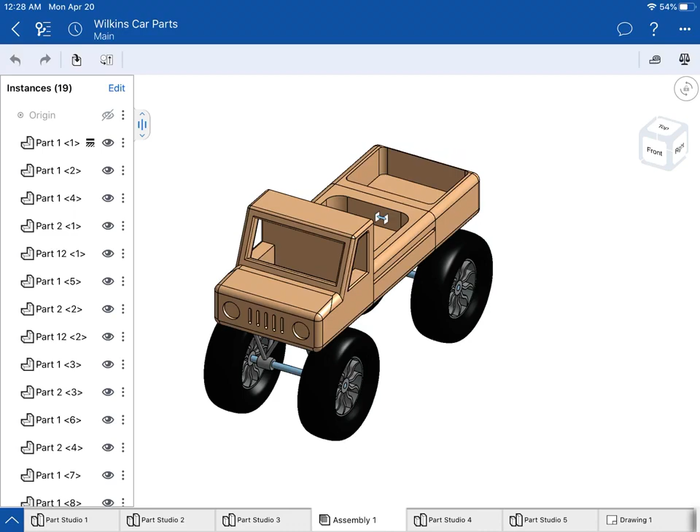Alright everybody, so I'm going to show you how to assemble your car. This is what I've done, so I just need to basically start over and show you what that looks like. I'm going to create a new assembly. This is how you create new things, by the way. I'm going to create an assembly, completely blank, and in order to do this, first I've got to start placing some objects.

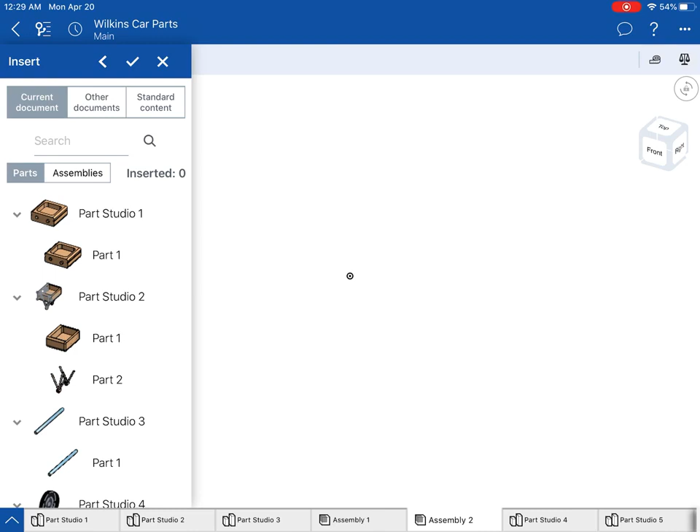So I'm going to need to put that one in there. That's Part Studio 1. There's just that in there. So that's that. Now the first thing I probably want to do here is fix this.

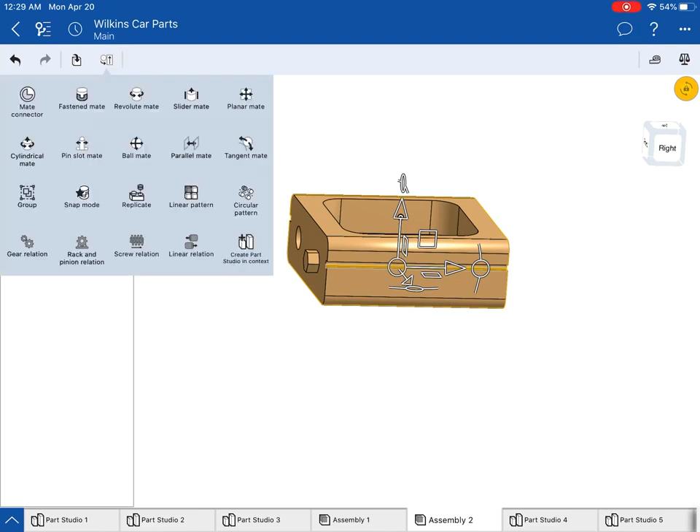I'm going to hit check for just a second. I want to select that part, really, just the whole part. Part 1, double tap, and I want to fix Part 1. Alright, so now that thing doesn't move at all.

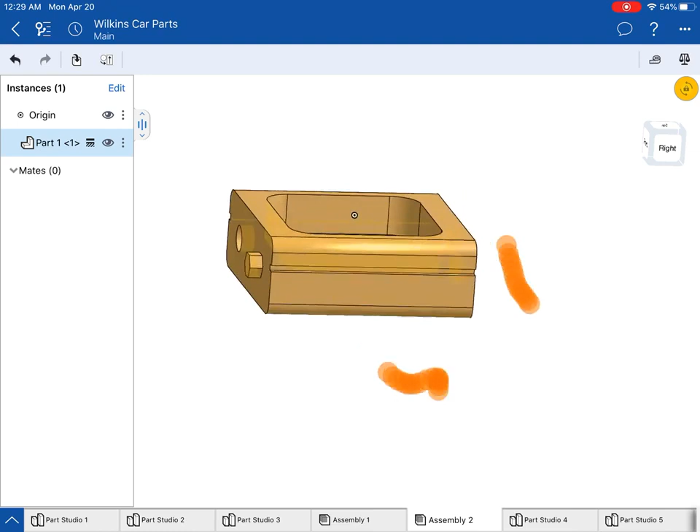I'm trying to move it, it's not moving. Alright, I can move my view, but I can't do that. So I can move my view, but it's not going to move the part, which is great. It's kind of what I want.

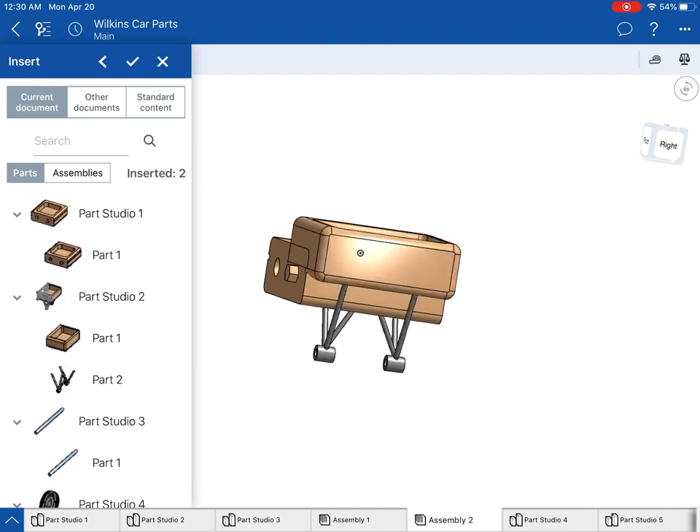Alright, now I'm going to go and place my back part, and I'm going to do the whole thing. So it's kind of in two different parts. That's kind of weird. That's something we're going to have to do something with.

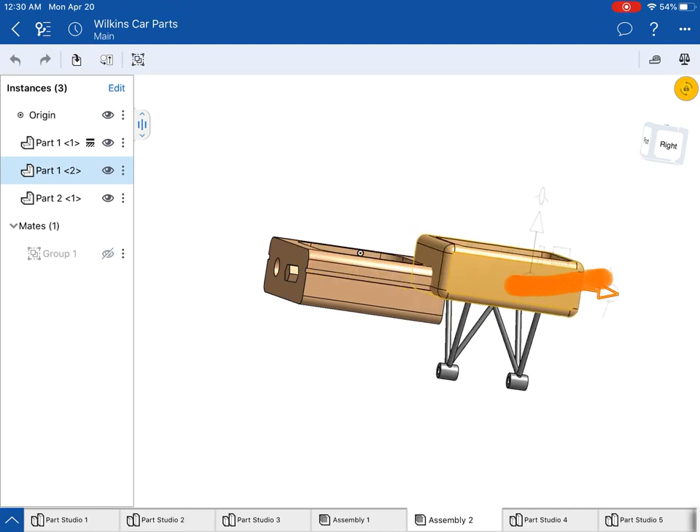So I'm going to select both parts. I'm going to choose to group those two parts, 1 and 2. There we go. So if I group those parts, when I move this thing, it will move the whole thing and not just part of it.

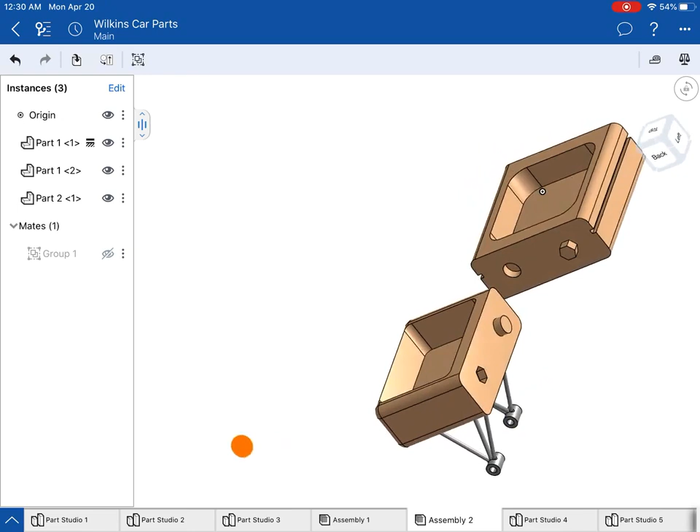So then the next thing I want to do is get this thing attached. Alright, so I have my holes and my knobs ready, so I'm going to get that working out. This part is different. Assembly is way different than Inventor, but it's really not that hard to figure out once you spend some time in it.

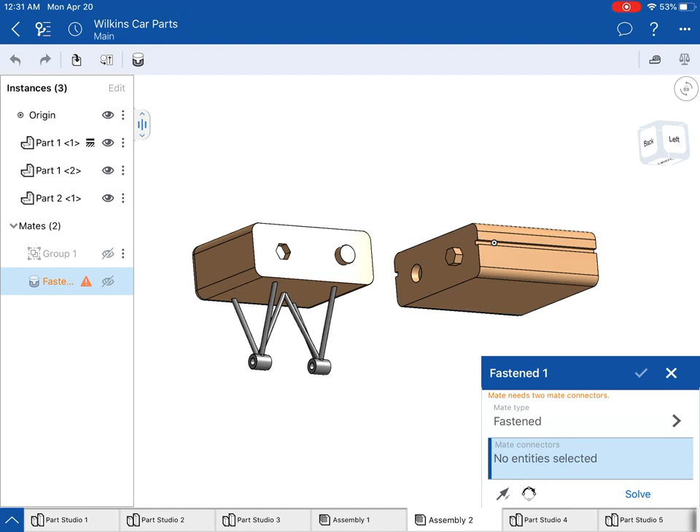So what I'm going to do here is make a fastened mate. That means this thing's going to stick into this thing and be there, it's not going to change. The best thing I can do right now is make my hexagon the fasten mate. So I'm going to click on the middle of the hexagon on that piece, and then I've got to switch around here, then do the middle of the hexagon on this piece.

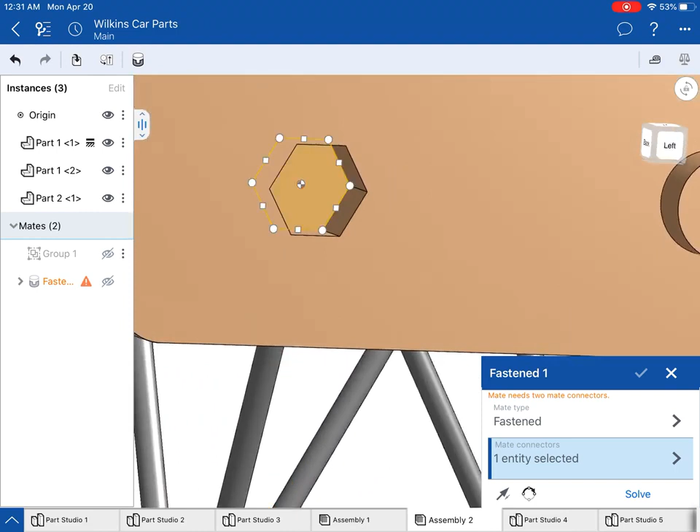You have to tap the piece, and then you have to tap where you want it to fix to. Alright, now it went away because I told it what it was doing. So it's trying to fasten that piece. Right now it's doing the wrong direction, which is fine.

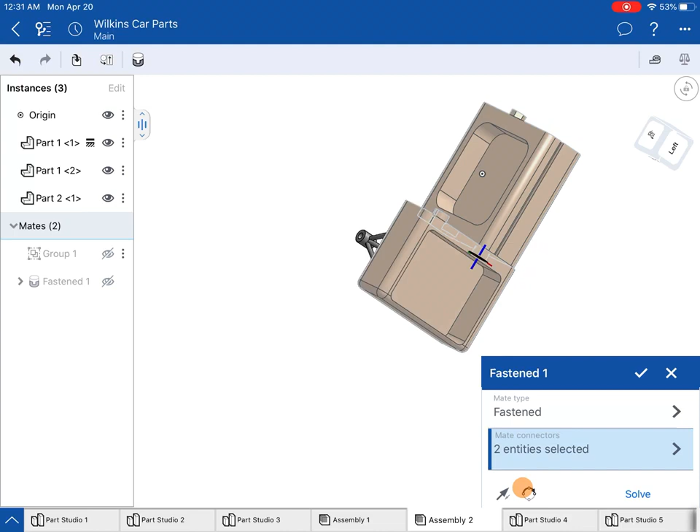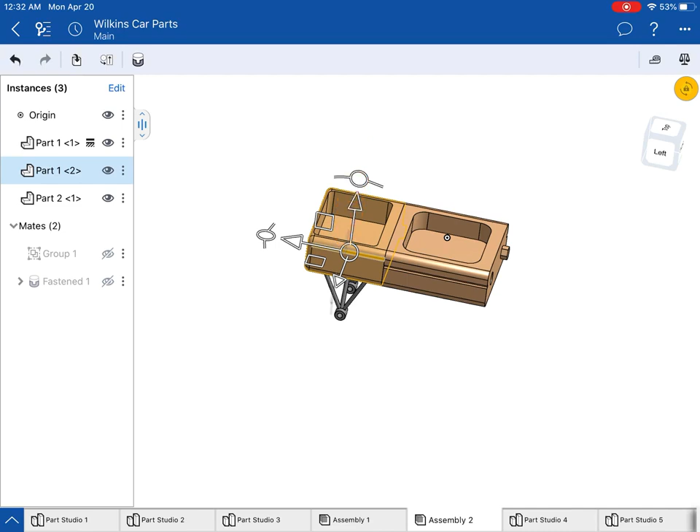I'm just going to switch the direction. Alright, you'll see now it's upside down, but if I rotate this thing like that, then it is going to be perfectly aligned, exactly what I want it to be, just like that. Now if I just leave that, when I go to tap this thing, it won't move at all. That's what the fasten mate does, it makes it not move at all. There's other types of mates you can do that we'll do here in a second, but that one doesn't move, which is really nice. So there we go.

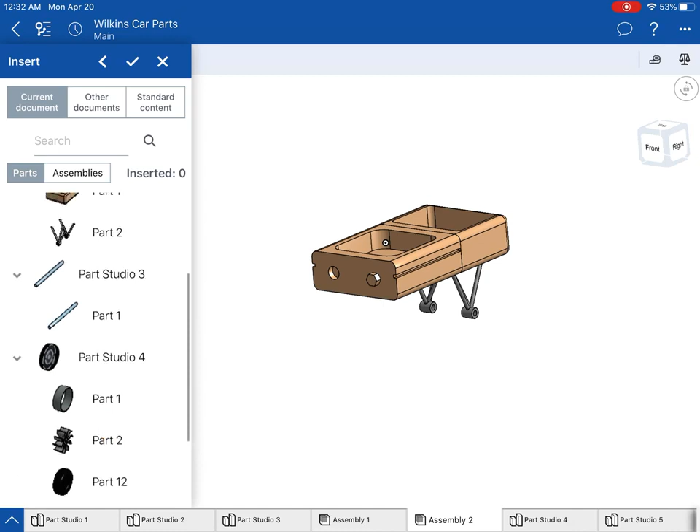Next I am going to add the front. So I'm going to place an object, and put my truck front here. And again, I'm going to do Part Studio 5, the whole thing. And once again, if I go ahead and group those two parts that I just brought in, which would be these two...

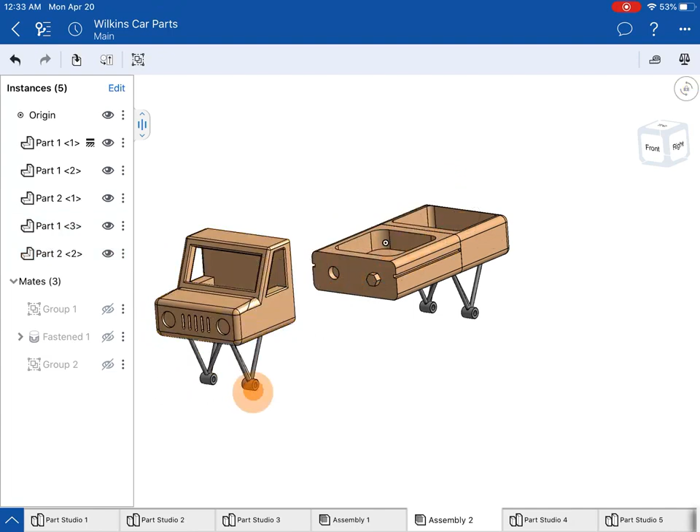Then I don't need to worry about fixing the bottom here. So that bottom part is technically a separate part, but since I want to insert it in there, I'm just going to leave it. Alright, I want to do the same thing. I'm going to fasten.

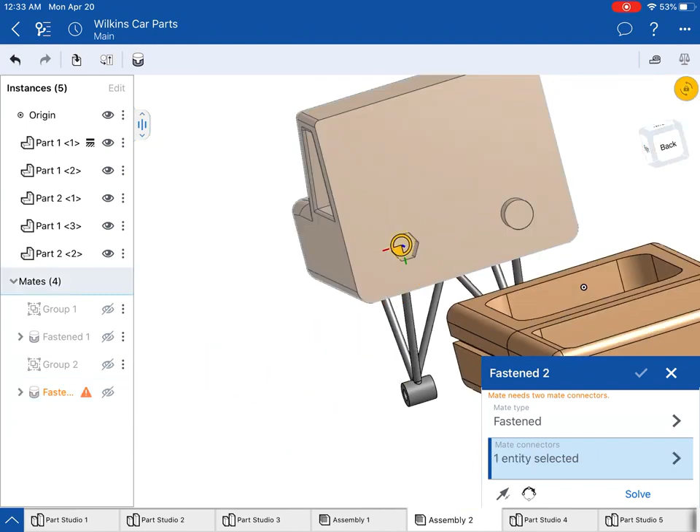Yikes. That thing. There we go. Now we notice that I'm unlocking the view to that thing. All right, and oh wow, that did it the way I wanted it to this time.

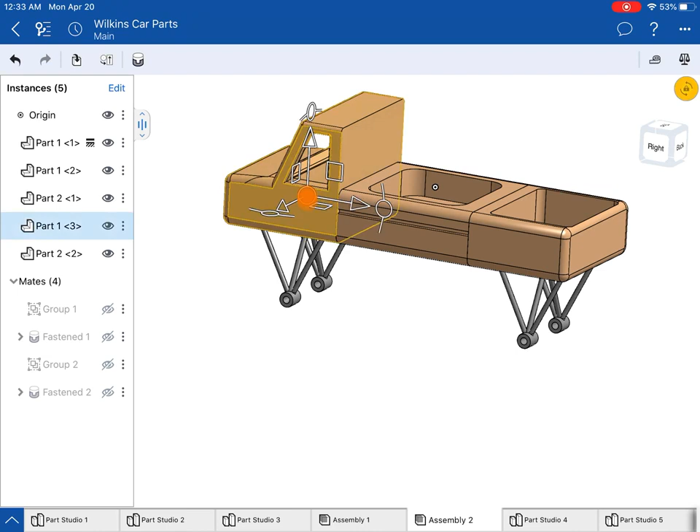That's great. All right, so that's all fastened. Again, none of this stuff is able to move. If I try to move this, it's not moving. By the way, the way you make things move is you select the arrows, or the circles, or the rotating piece, but none of that's moving right now because it's not supposed to.

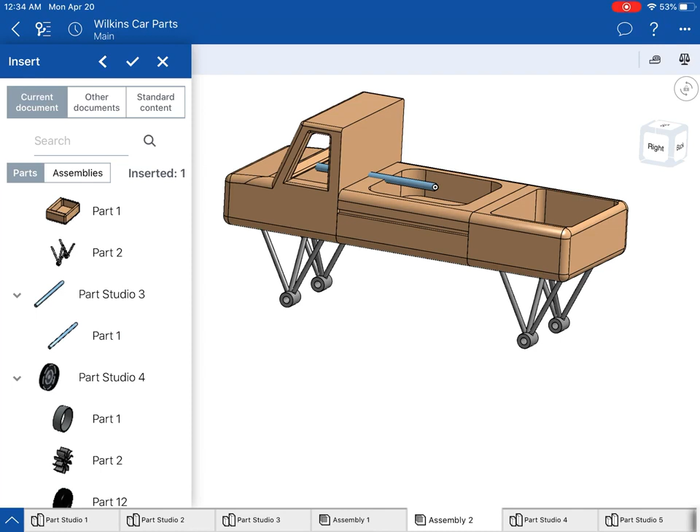All right, so now I'm going to get an axle. I'm going to place, I'm going to go ahead and place two of these things. So there's one, and there's a second one. Check. All right, there's that. Oops. Let's see if I can get that piece right there. Yep, I could move that out here. I could rotate it a little bit if I wanted to. All right, so that's where we're going here.

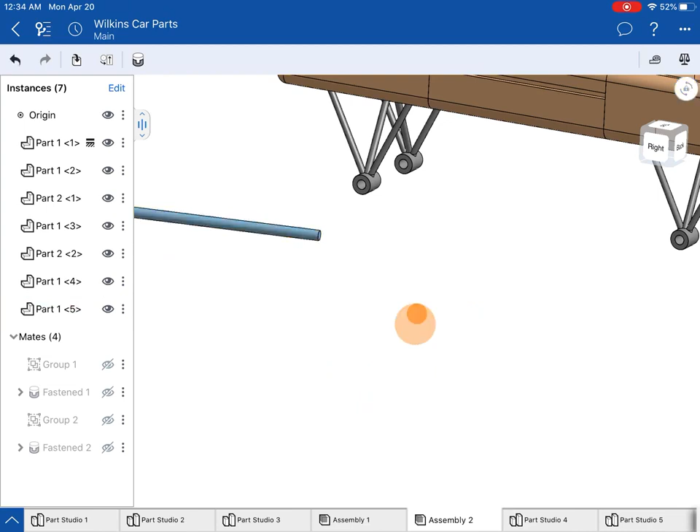Now I want this to... oops, I want this thing to go inside of those holes there. So I'm going to do a different type of mate here, and the mate we're going to choose is a slider mate.

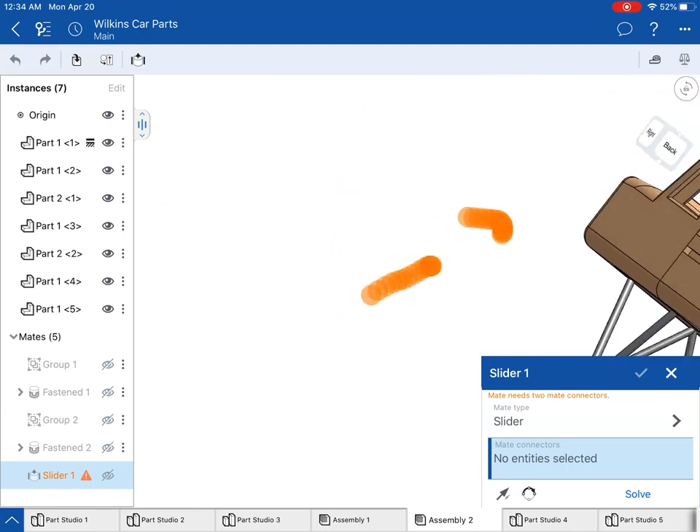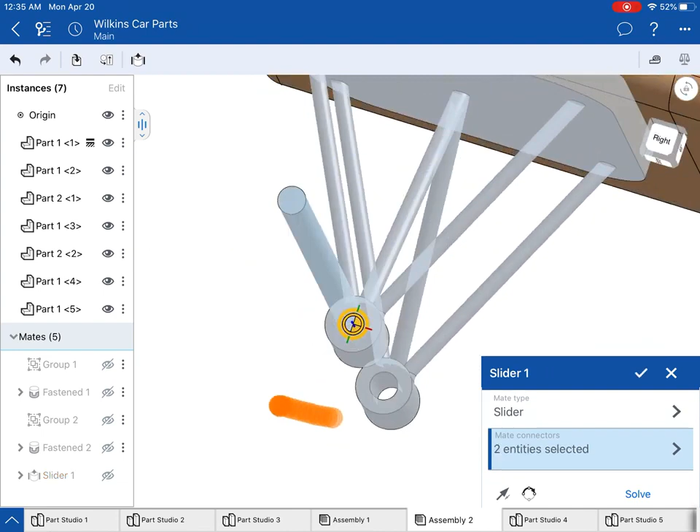Okay, and oh, that thing's really far away. It doesn't look like it is, but it is. So I'm going to get the center of that to line up with - I got to turn that lock off again. I'm going to line that up with the center of that. Okay, so I have my axle sticking out kind of the wrong direction, so I'm going to switch directions here. But that's not far enough away either.

So the thing about sliders is you can do some offsets. So I can change that offset. Oops. Is that what I want to do?

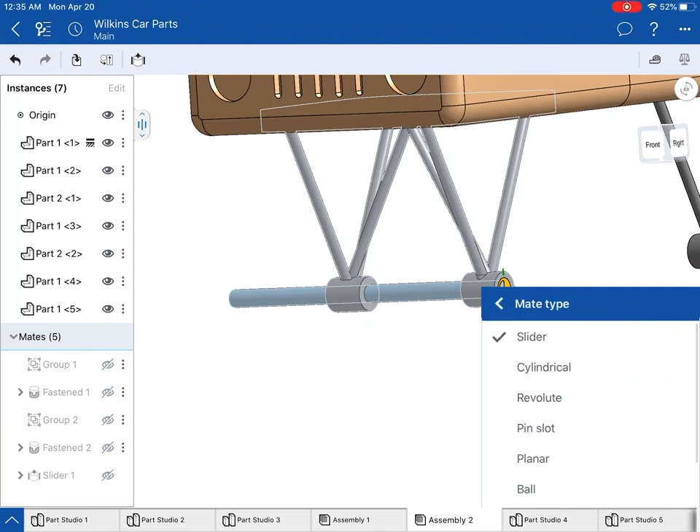I'm starting to think maybe I didn't want slider. Maybe I want cylindrical. If I do cylindrical, then I can do... that's not it. Shoot, I thought I had this figured out. Revolutes, ball, fastened, parallel, slider. I thought slider was the right one.

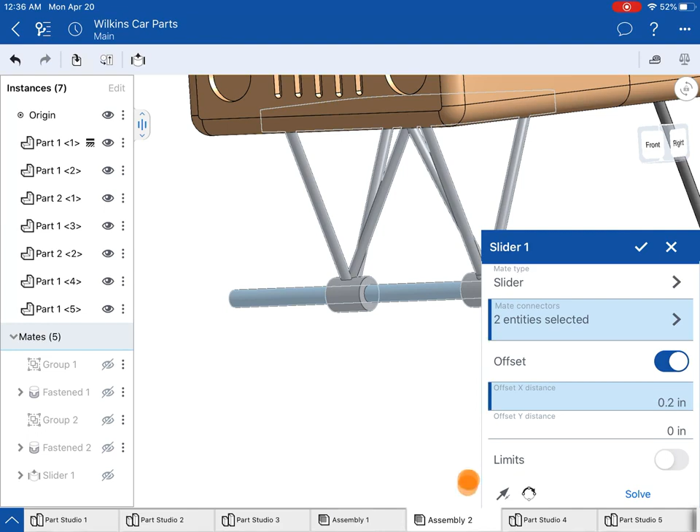Let's see what this does. 0.2. Check. Yeah, see, that sets it off that direction. That's not what I want. I'm pretty sure it's not, it's supposed to be offset a different way. All right, so limit minimum distance 0.7.

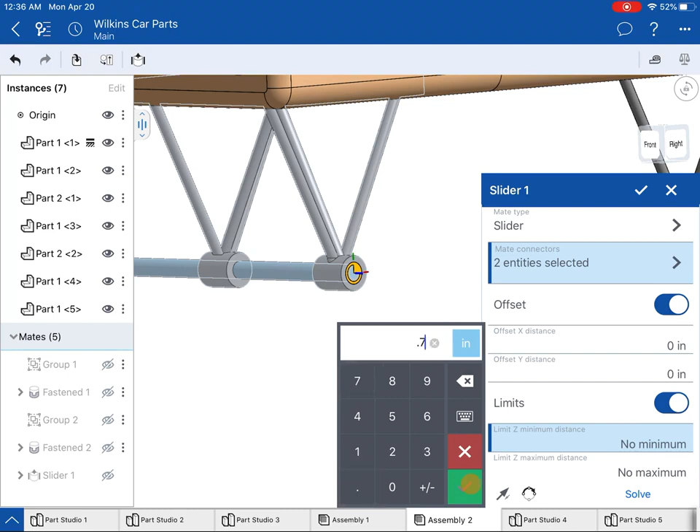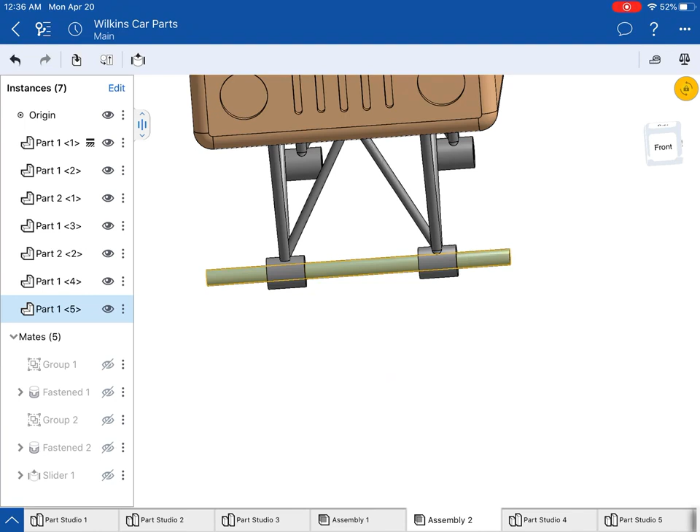That's what I want. I think there's a different way to do this, but for right now, we're just going to do 0.7 to 0.7 and then check, and that thing's not going to go anywhere. So if I select that, it's not moving anywhere. All right, so what I did is I told it like a minimum and a maximum distance to move. So I could technically have this axle move back and forth in there, but that's not what I wanted to do.

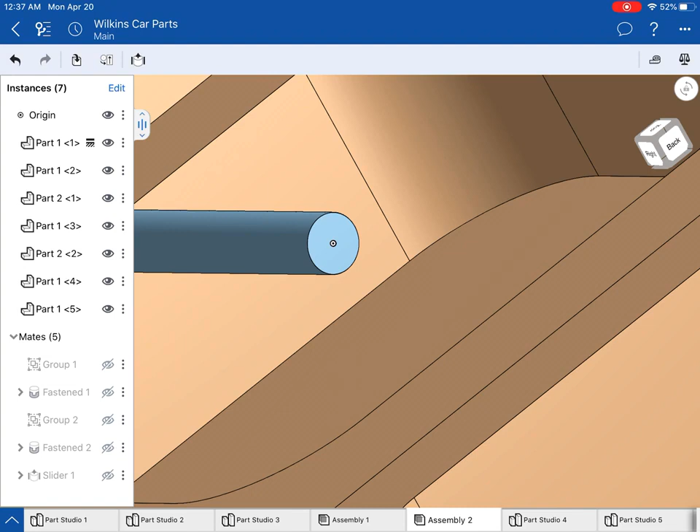All right, so let's get the other one here. This time, I'm just gonna take that. Oops, let's get... I guess it did end up being that slider mate, wasn't it? Oh, I just feel like cylindrical mate's supposed to be able to do this.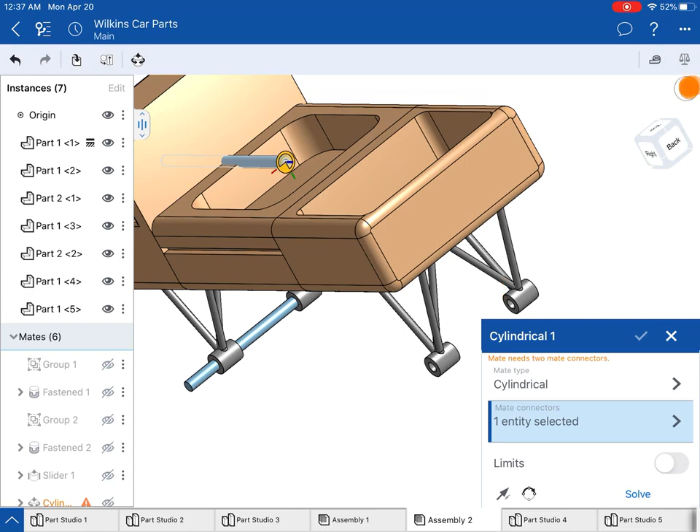There we go. So I'm going to choose that, and I want that to go into that right there. All right, and, all right, well, I mean, there we go, limits, Z - I mean, I can do the same thing here, so I can do 0.7, check - this is just taking a while, there we go, so 0.7 to 0.7, and then it's ready to go.

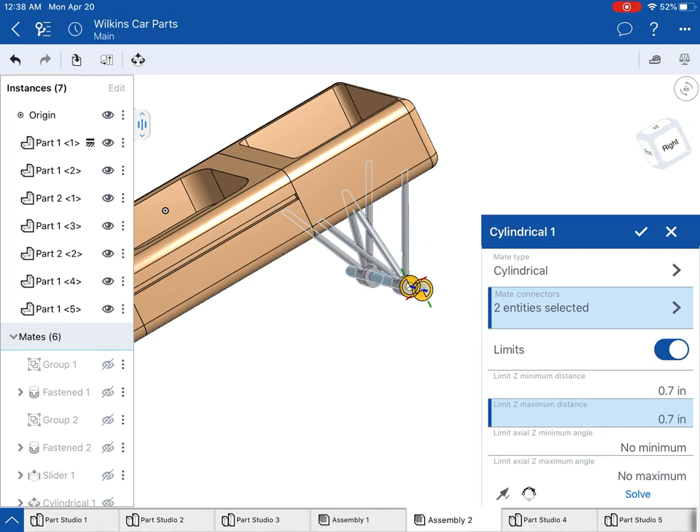All right, let's check. Let's see if it rotates at all. Oh, that's why I wanted to do the other one. Okay, so I need to fix - all right, figuring it out now. I don't want this to be stuck here. I want this to be able to spin around, and I don't know that it is.

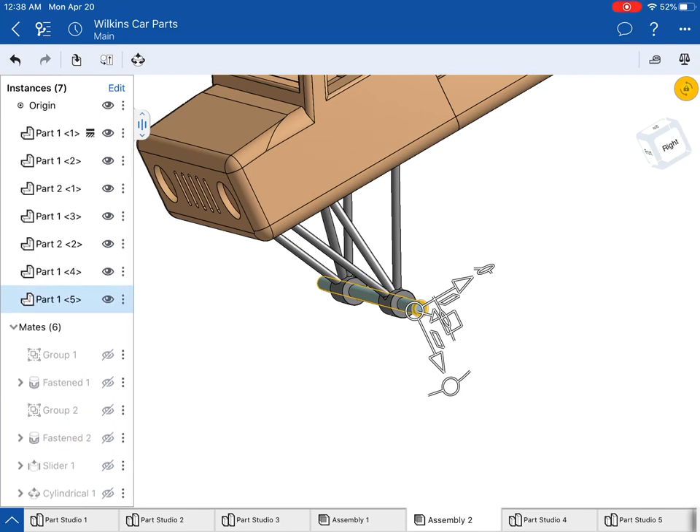So I need to fix that type of mate that I used instead of slider. Let's edit that. So instead of slider, I need to make it a cylindrical, and then it still can move around.

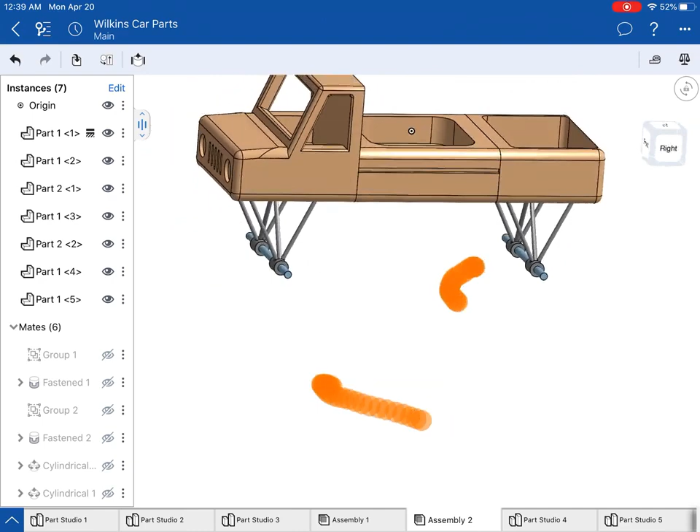All right, we still want our wheels to be able to move, so that's the part I was trying to get. Okay, last is the wheels. We almost got this, guys. So I need to add 4 wheels. They're going to go right on top of each other.

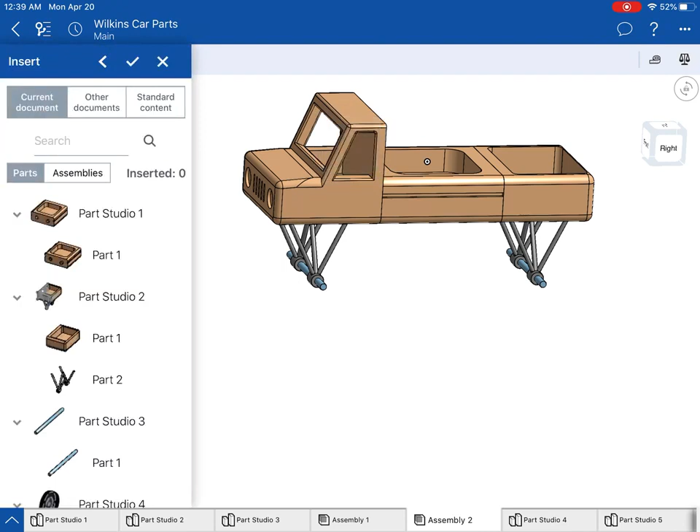Now you'll notice that my wheels have multiple parts to them. All right, so we kind of have parts 1 and 2. Oops, I don't want to do that. Let's X that. Let's try that again. So I have part 1, part 2, and part 12, it looks like in here. If I select that thing, though, that'll get me one of those.

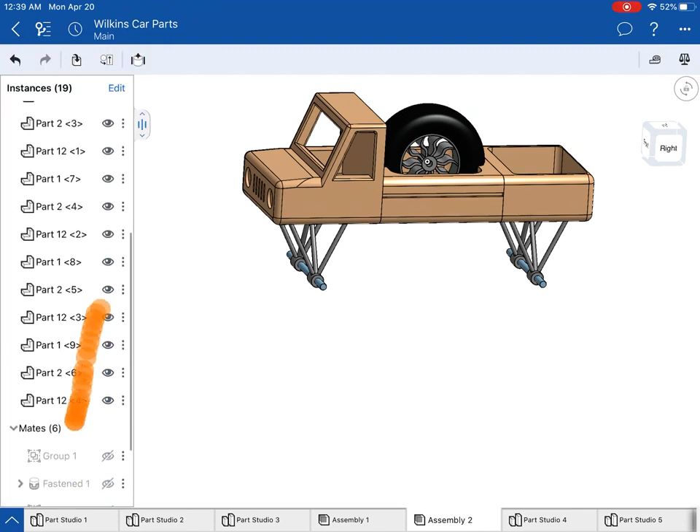And then I want 4 of those, though. So I'm going to do 2, 3, 4. And in here, it's going to show up as parts 1, 2, and 12 multiple times. So I'm going to get these 3.

I'm going to group them. I'm going to get these 3. Oops, not those 3. I'm going to group them. And then I'm going to get those 3 and group them. And then I'm going to get those 3 and group them. Okay, so that was kind of weird, but that's what it's going to take.

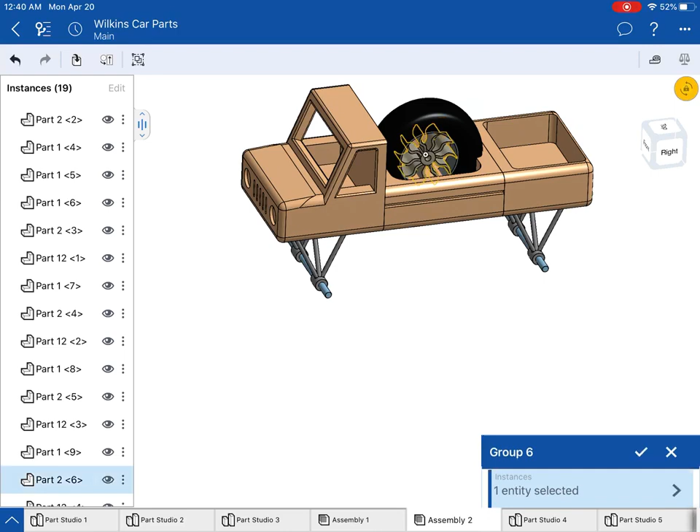That's part 2. Group 6. No more grouping. All right, let's pull that wheel. Oh, no, that's not what I want. That's supposed to be in a group with... Okay, let's pull that back. 1, 2, 3. Those are supposed to be in a group.

Check. That's the problem. Group. Check. 1, 2, 3. Group. Duh.

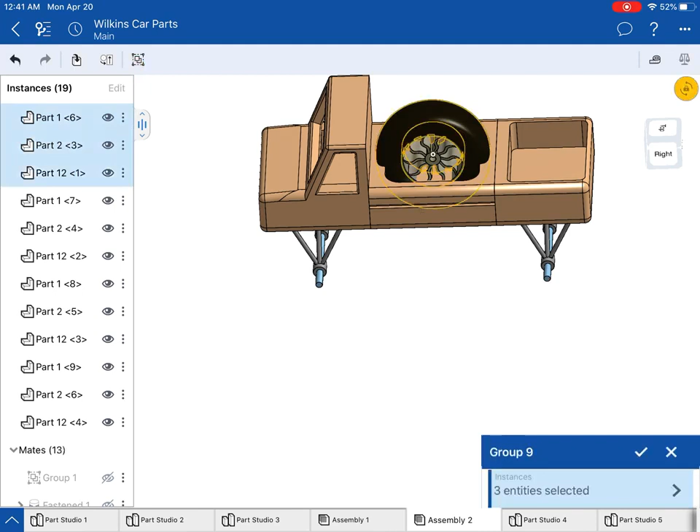Check. 1, 2, 3. So you guys probably noticed this before I did, but that's because I wasn't seeing what I was doing here. Okay, my hand was covering that selection box. All right, so now let's see. If I move this group, does it move the whole thing? Yes. There we go. That's what we wanted.

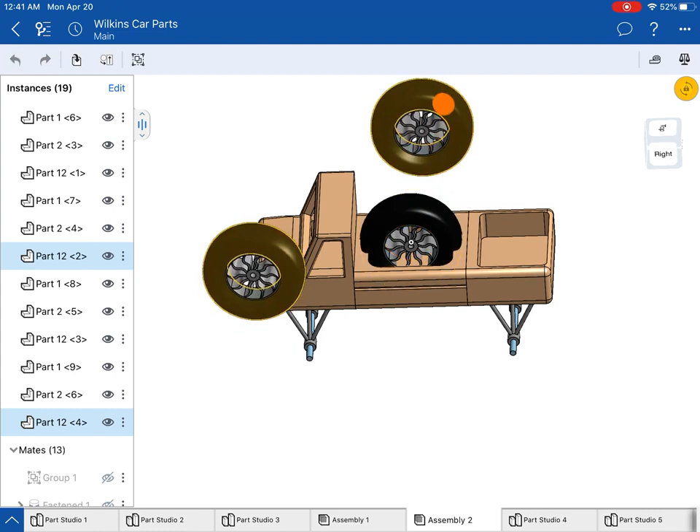All right, so there's one tire, or one wheel, I should say. There's another wheel. There's another wheel. And every time, there's another wheel. All right.

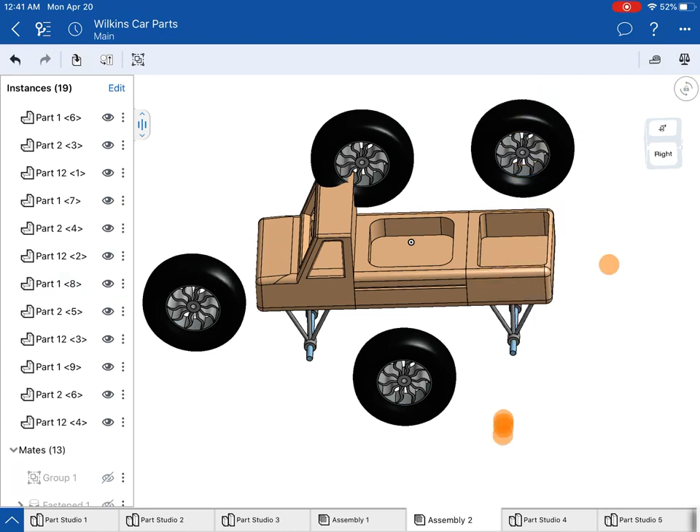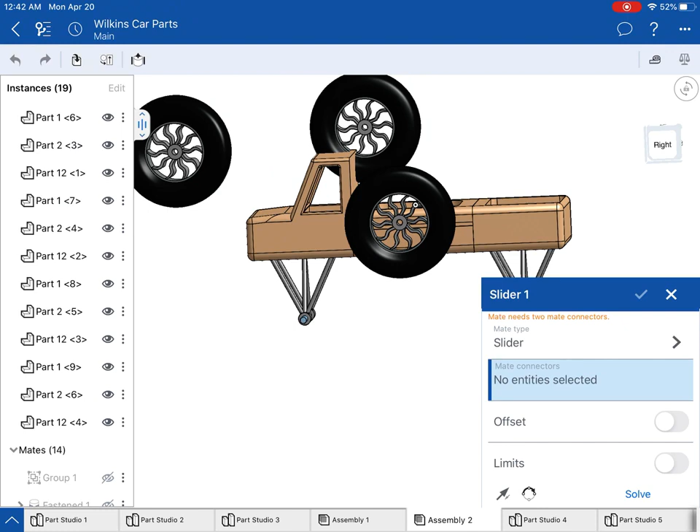Now we gotta get these things on. All right, so for this one, I want to do a slider mate. I guess I could have done a slider mate for the axle and then just had the wheel be the thing that's turning, but I actually wanted the axle to be the thing that was turning, so whatever. All right, so slider, I'm going to choose the middle of that circle.

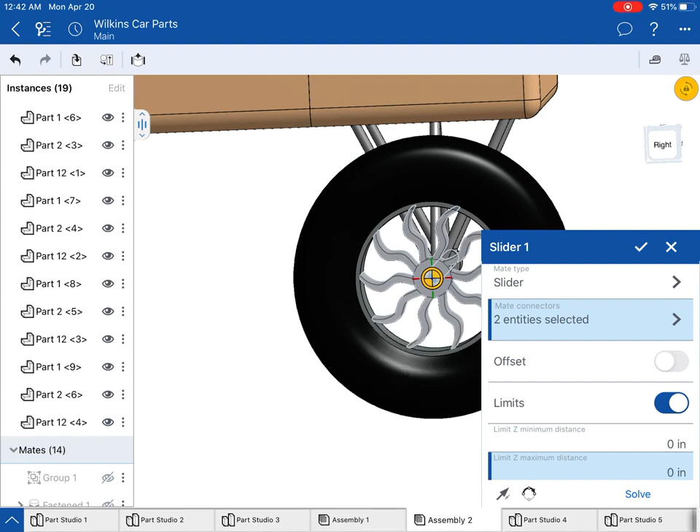Again, you have to tap twice. You have to tap the circle, and then you also have to tap the center in order for it to go on there. All right, and my limits will show up here in a second. I'm going to do 0 and 0, so it's not going to move from the position it's in right now. All right, so there's that. And then I'm just going to do that with all of these.

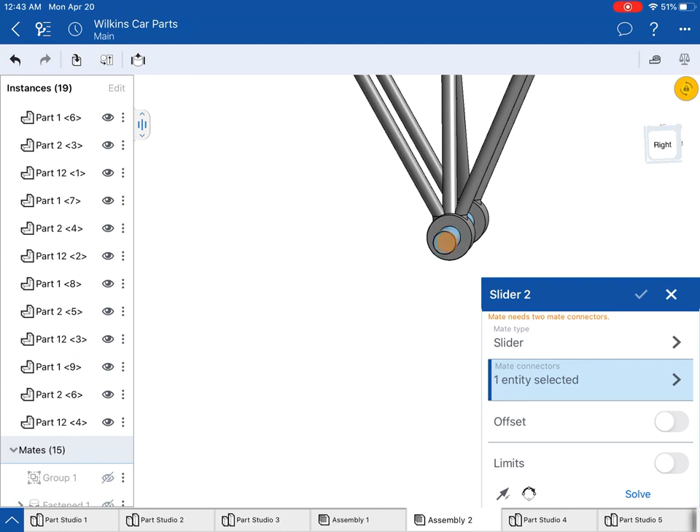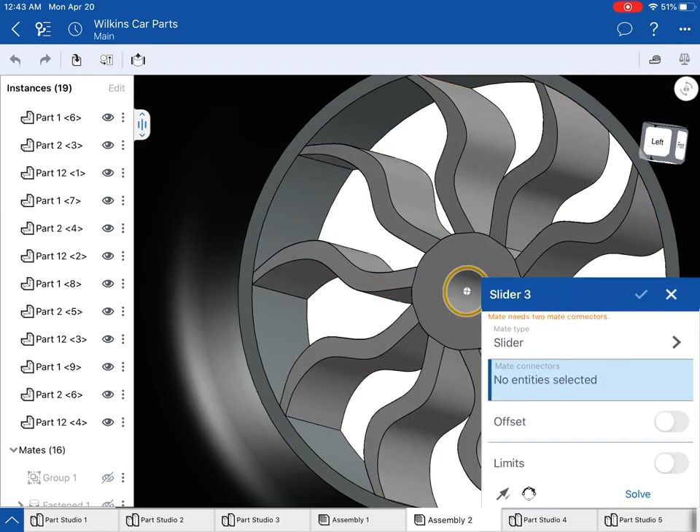All right, so I'm going to do slider mate with that and that, and limit 0, 0, check. All right, I'm just going to keep doing that real quick. Here we go. Here's this one. Slider mate. There we go. That to that. Limits 0 and 0. Check.

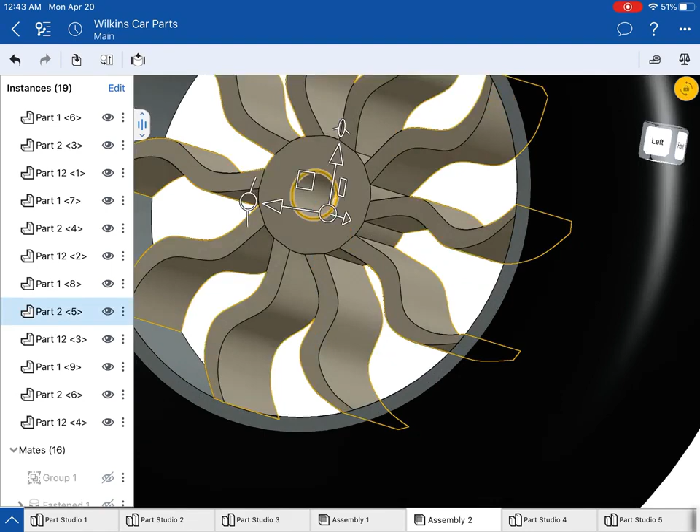And last one, this one. There we go. Limit 0, 0. Check. All right.

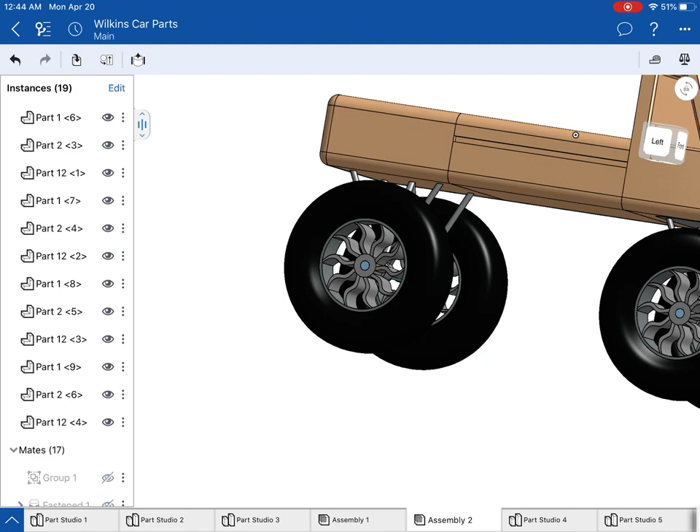There it went. Did you see that? Woo, it rotates. So much fun. All right. So there you go. Got my big monster truck, sort of.

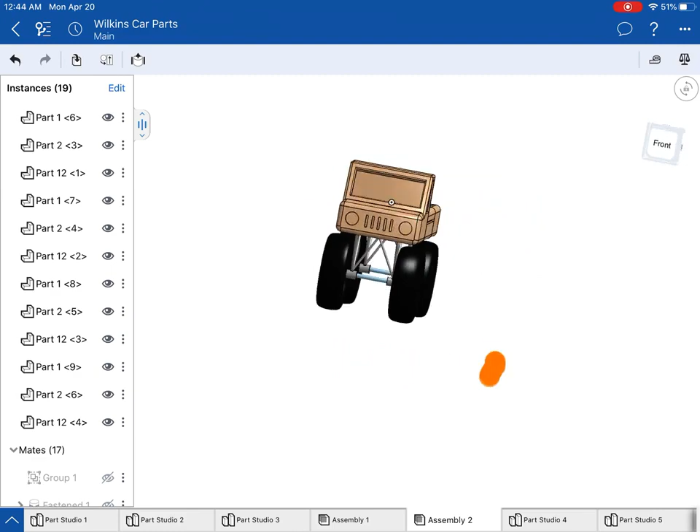Hope you guys enjoyed that. Again, I was going for something quick that I could get you some information. I'm sure some of you are going to come up with some much more awesome stuff than that. Be glad to see what comes out of what you guys are working on.